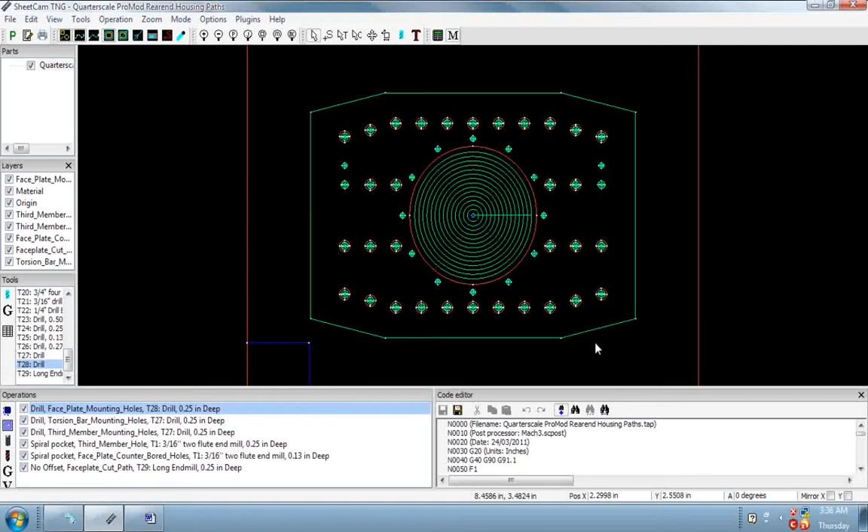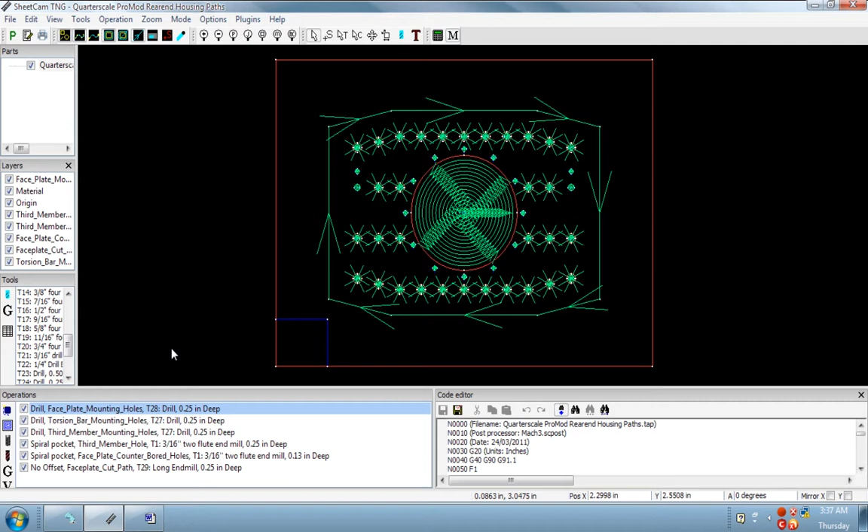As you can see, we're back over in CAM. This is the face plate for the Quarterscale ProMod rear end. I think I missed a few things in the last one. I'll go over that briefly here quick. These are the tool paths, the direction the tool is going. This is my table layout. I do believe I did go over that one.

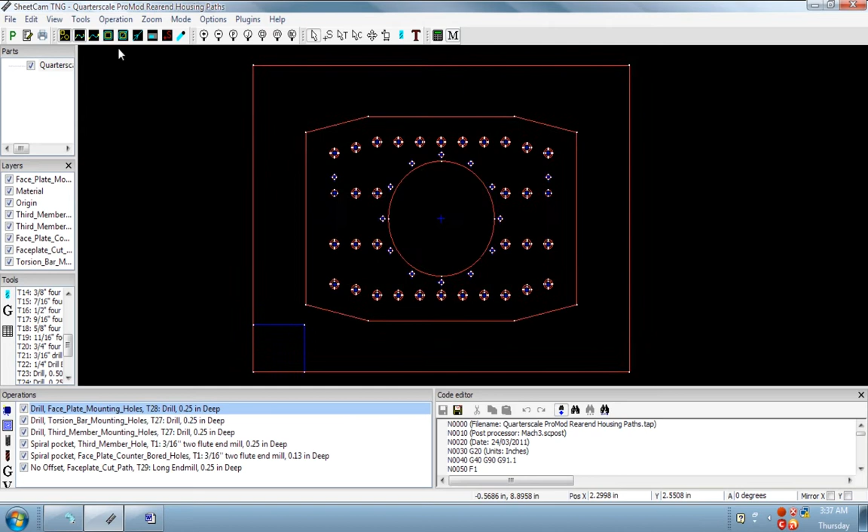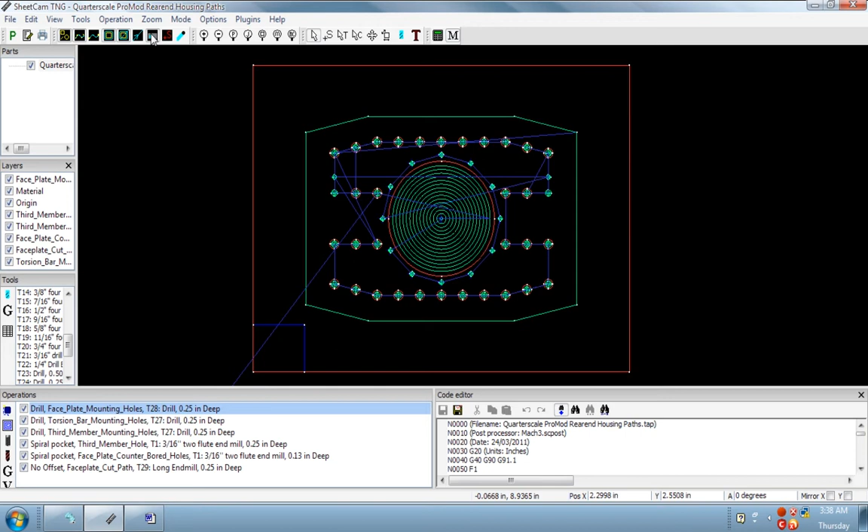Okay, and this is your tool path. With this running in the background, it does tend to slow things down a tad. Rapids. This is the rapid coming in from your origin. This is the direction all your processes are going in. It always runs to your right. That can be altered, but it's not necessary.

I want to zoom in here a little bit so you can see what's going on here. If you remember, in the first video we were machining the actual housing. Them holes were 0.089 for 4-40. These holes are just a little bit bigger, so these screws will go through this faceplate material. This outside circle that you see here, that is the actual recess, the countersink.

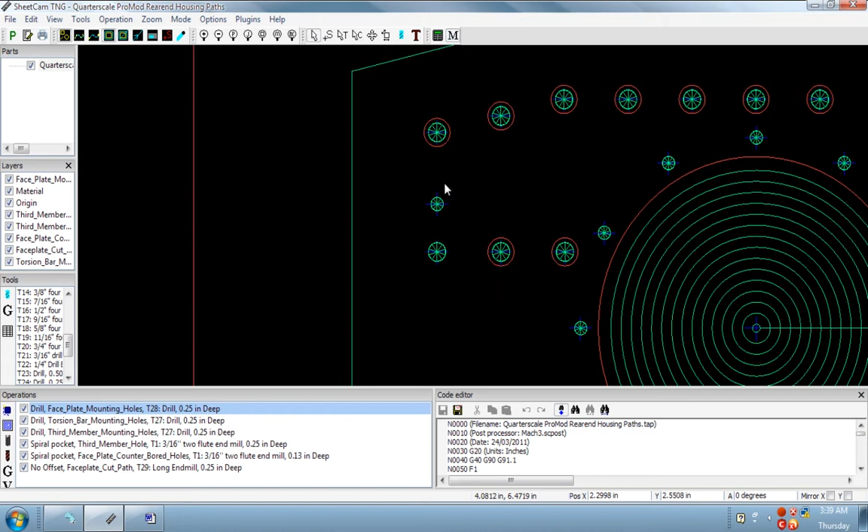This one here is your 089 thread, 440 thread, 089 screw hole rather. Then this hole here is the same size. It's not countersinked because the bracket will mount here for the torsion bar. It's not necessary to countersink it when it's below the bracket. And the countersink is a couple thousandths below the surface as well. Anyways, if I did, it would still set flush. That wasn't necessary to mess with.

So what I'm going to do here is head right on over to the simulation. Get started on this one here. I'm going to leave it a little bit big here so you can see. Now what's going on, this is 1/4 inch thick 6061 T6 aluminum. And here we go. I don't remember right offhand how long it takes to run this job. And you can see with the crosshairs, that hole actually looks way too small. That's just in the simulation.

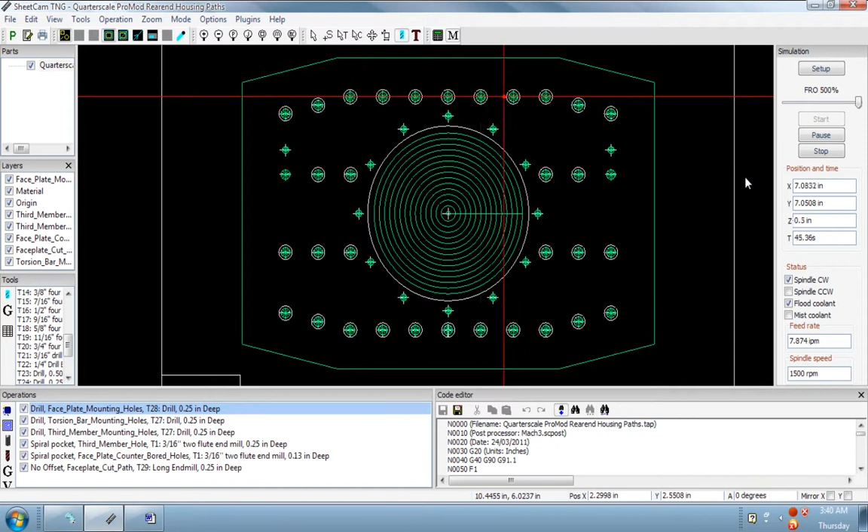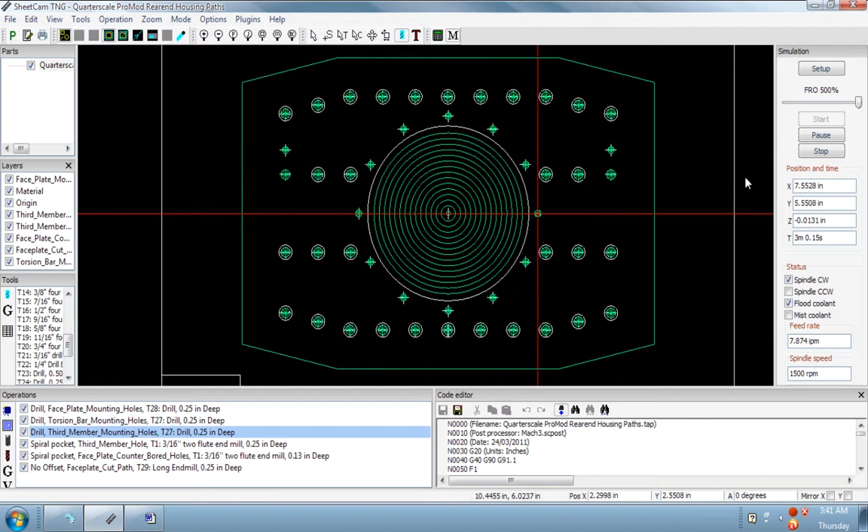And this is drilling a hole for the screw to actually slide down into. I don't remember the dimensions right offhand, but it's just a hair slop around it, and then it goes to your little holes there around your third member. And then on in the pocket in the center. This hole will be completely cut all the way out for your third member, to gain access to changing your gears and loading everything in the rear end and whatnot.

I could have machined that out where it's just wide enough for your gear to pass through. In my opinion, I want to do it bigger like this, just to make it easier to get to. Also makes it capable to run a larger gear. You could run up to pert near a 3-inch gear in it. It's a pretty good size gear. There'd be a lot of combos on ratios there with taller gears and whatnot.

On this video here, we're about 8 minutes into it. This one will run fairly quick. And right now on Z we're at minus 0.2362, and it's only going to 0.25, so one more pass. The outside is a fairly quick process as well.

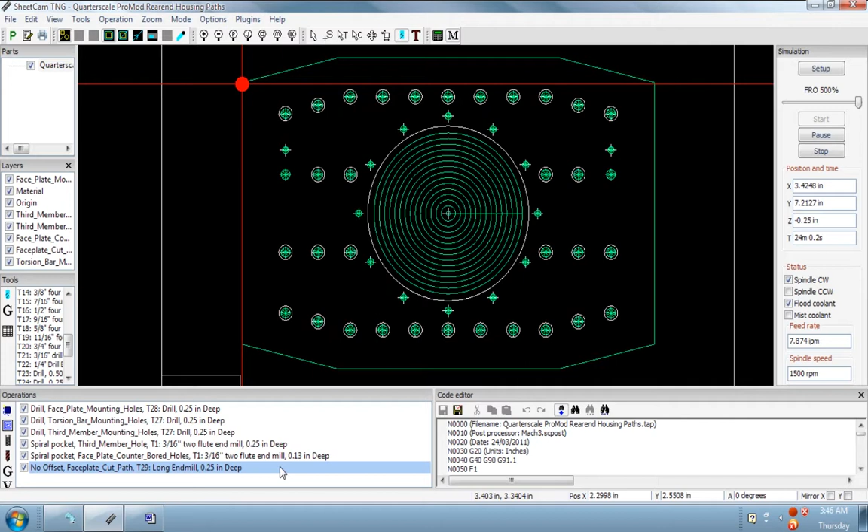And we're at minus 0.2362, so it should have one more pass. And it is. This was the final pass. And I could change all this in CAM when I actually start machining the parts, as far as my IPM, feed rates. IPM stands for inches per minute. Feed rates, inches per minute, peck rate and all that could all be changed within this program or in the CNC controller program. In my case it's Mach 3.

And we are done. Pretty much sums up this video. That was a quick one as compared to the first one. 24 minutes, 45 seconds.